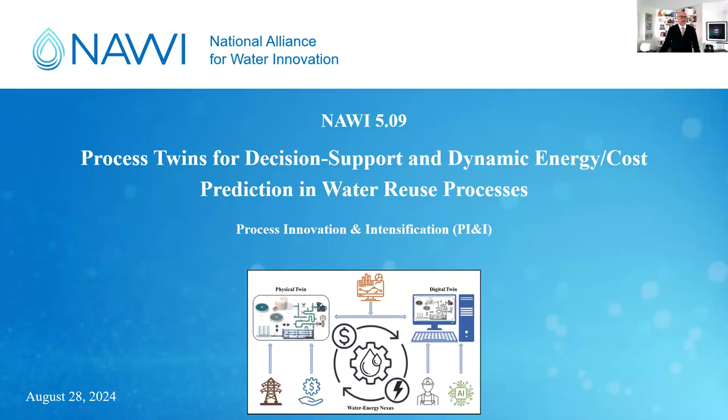Hello, everyone. Good morning and good afternoon, wherever you are. And we have the deck here now pulling up. So today it's my pleasure to introduce the team and the slides on behalf of the team, and then pass the baton to the rest of the team members to tell you the story about this ongoing project. The project team, you can see, is two institutions: UCI and Oak Ridge National Lab.

We have a number of people today from the team who will present. Philip Bingham is the co-PI with me, managing the project. From Oak Ridge, we have Chris Villet, Alex Melling, and Sally Ganem, who are three researchers. From UCI, we have Brian Taroja, who's a researcher, Nader Rezai, who's a postdoc, and Puri Gorbani Bam, who's our PhD student.

First of all, I want to say that Orange County Water District deserves all of our praises and many thanks, and a Nobel Prize, for hosting the project and supporting it, because I can never find enough words to thank them for all the support they've given us in the field and to the rest of the team. They're hosting the pilot there. I also want to acknowledge Glacier Technologies, who have been really generous in helping us fabricate, commission, and debug the pilot unit.

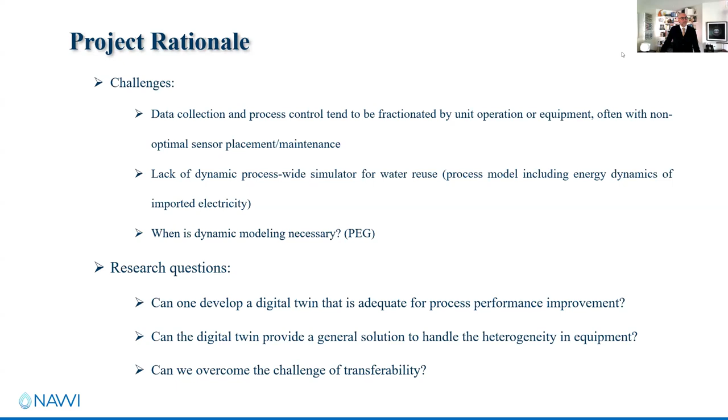Thank you, hello everyone, this is Nader. I would like to talk briefly about the digital twin, the concepts and challenges associated with it, and then I will talk about the development, design, and implementation of our pilot, which serves as a physical twin for this project. Although there are several definitions of a digital twin, I like this short definition that says a digital twin is a virtual representation of an operating physical entity synchronized at a specified frequency and fidelity.

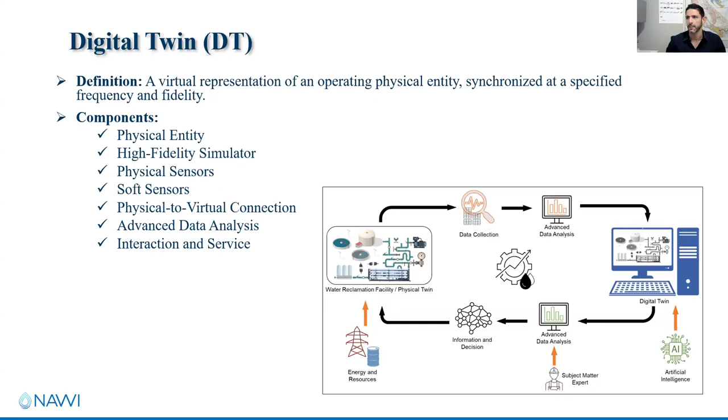So this physical-virtual entity has to have several components in order to be considered a digital twin. They include an operating physical entity, a high fidelity simulator to simulate the main processes in the physical entity, sensors so we can get data throughout the physical system, two-way communication between the physical and virtual entities, advanced data analysis to translate and curate the data between them, and obviously they have to provide the service.

So if a digital twin is implemented in its full scale and full application, it can provide a variety of services, including monitoring the physical entity, optimizing it, calibrating the physical entity, forecasting the behavior of the system, and evaluating sensitivity analysis to the input parameters. It can also serve as a safety feature, for example shutting down the system when a variable reaches a certain threshold.

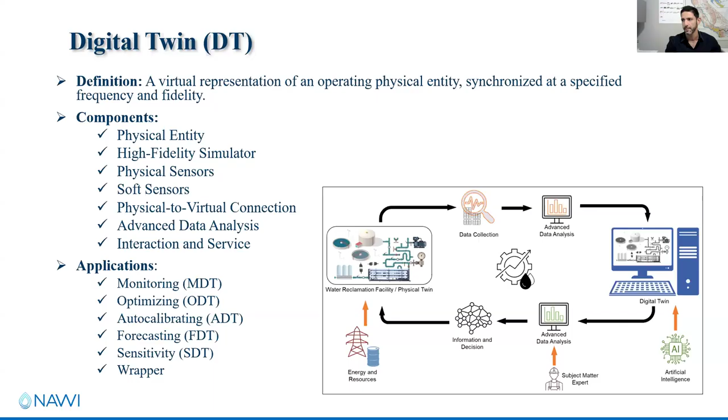So in order to better understand what we have to consider and what challenges we'll face in implementing the digital twin in the water industry, we first evaluated studies focused on development of digital twins in other industries to see what lessons we could learn. Then we reviewed over 100 papers and reports focused on development of digital twins in the water industry. As you can see on the right, though it's very tiny, we went through all of those studies and figured out what they focus on and what features of a digital twin they consider in their study.

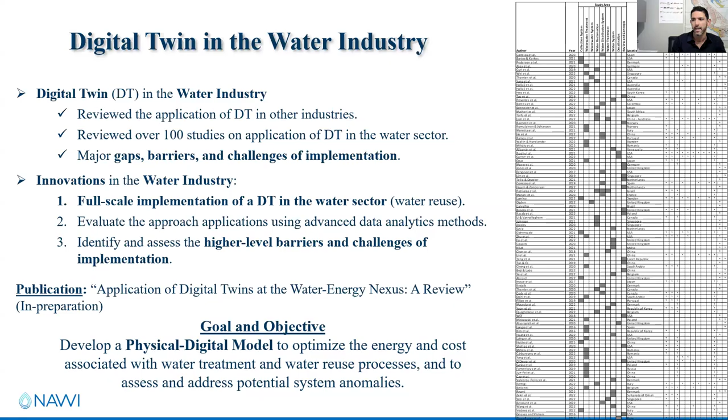Although the majority of these studies haven't even come close to implementation of a full-scale digital twin in water systems, a few of them seem very promising, and the majority of those few are developed by major water design companies. We are putting together all of the findings from the review study into a comprehensive review paper. We defined the goal and objective of this particular project as development of a physical digital model to optimize the energy and cost associated with water treatment and water reuse processes, and to assess and address potential system anomalies.

So for implementation of our physical twin, which is basically our pilot, we selected Orange County Water District, or OCWD. OCWD is one of the most advanced and largest water reclamation facilities in the world. You can see the process flow diagram for the facility in this slide. As you can see, they consist of membrane microfiltration, ultrafiltration, and then cartridge filter, reverse osmosis, UV disinfection, and decarbonation.

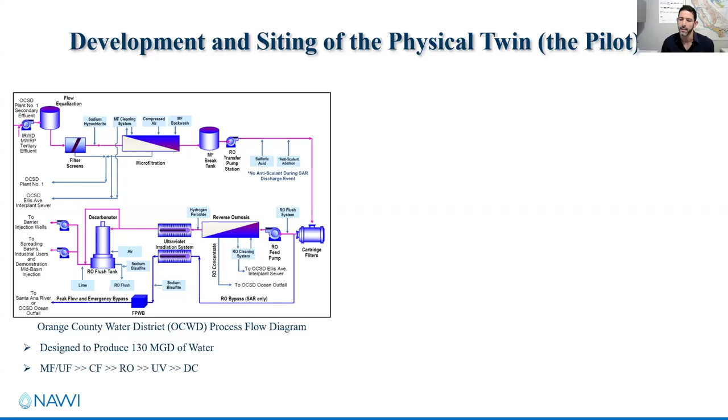The plant is designed to basically produce 130 million gallons of water per day. So although we had some limitations in terms of space, budget, and timing, we tried to design our pilot as close as possible to the main treatment processes as OCWD, and then keep our operating points as close as possible to the operating points of the facility.

So you can see on the right the P&ID for the pilot that we designed. It is designed to produce 11,000 gallons of water per day, and it consists of the major treatment processes at OCWD: ultrafiltration, UV disinfection, cartridge filter, reverse osmosis, and again UV disinfection at the end of the process.

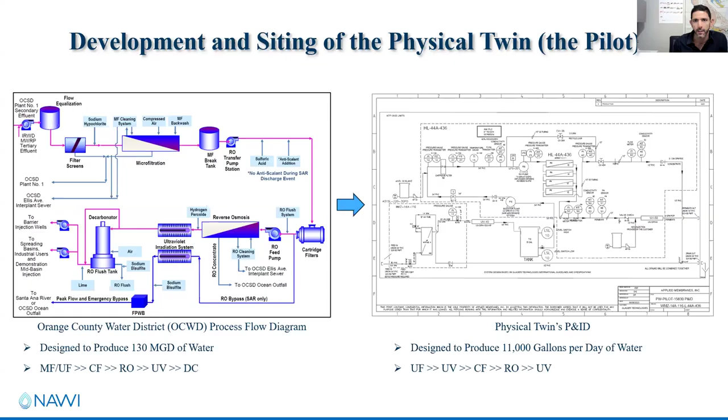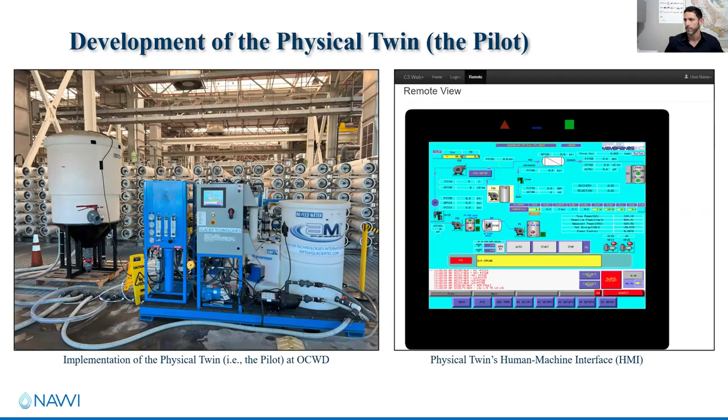And then we also equipped the pilot with a human machine interface. You can see on the right, the screen is basically here on the pilot. So we can monitor it remotely, and we can manipulate the pilot remotely, and it provides an interface for the physical and virtual entities to communicate to each other, to talk to each other through this human machine interface.

So in the past few months, we went through some modifications in the pilot. As I mentioned, one of the goals of this study is to look at the energy consumption and to optimize the energy and cost. So we equipped the pilot. First of all, we loaded this pilot with sensors, so we can get real-time data throughout the system, continuously, to monitor the operation of the system.

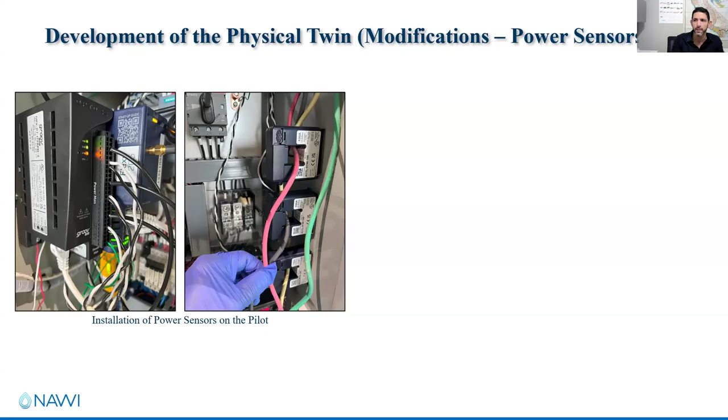And then we equipped it with power meters, so we can basically monitor the power consumption, the real-time power consumption of the pilot, one of the goals of the project. And then it gives us the true power at real time whenever we make any modifications, and then the net energy and the total power of the pilot.

So the other modification that we recently made, as I mentioned, we have a UF system in the pilot. Although we are using the MF-UF effluent from Orange County Water District, we had some fouling issues with our UF. So we replaced our previous UF with two new UF modules, and these two UF modules are equipped with an automated backwash system. OCWD backwashes their UF system every 20-21 minutes, and then we programmed our UF so it also backwashes the UF module every 20 minutes.

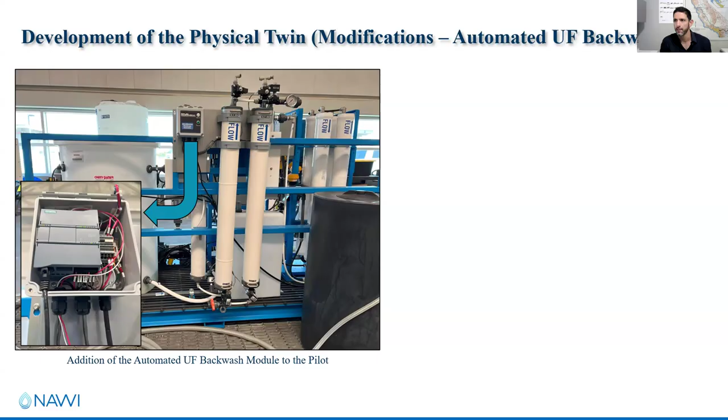And then also, as you can see in the small portion here, we modified our human machine interface also, so it reflects the automated backwash system, so we can also manipulate it, we can control it remotely, and also through the digital twin.

So for the simulator part, for the high fidelity simulator, we are using Sumo simulator developed by the Dynamita team. The Dynamizu is the version of Sumo which is particularly developed for water treatment and for digital twin purposes, which the Oak Ridge National Lab team are going to talk about in more details in the next few slides. So I'll hand it to Sally Ghanem from Oak Ridge National Lab.

Thank you, Nader. So we developed our digital twin with Sumo Simulator, which is a wastewater simulation software package that has a user-friendly graphic interface. Sumo was developed by a team of experts at Dynamita who has over 100 years of combined experience in modeling, to provide water and wastewater treatment process simulation software. Dynamita's President, Dr. Imre Takacs, is also a fellow of the UC Irvine Water Energy Nexus Center, and UC Irvine is also participating in the beta testing of the Sumo simulator.

So what makes Sumo different from other simulators is not only being an open source model, but also being editable, because Sumo models are written in an Excel-based open process code called SumoSlang, which can be easily modified if needed. In addition, the simulator features additional layers of energy and carbon footprint calculations based on the process model, and this capability can be used to assess the electricity demand and the carbon footprint of plant operation for a given period of time.

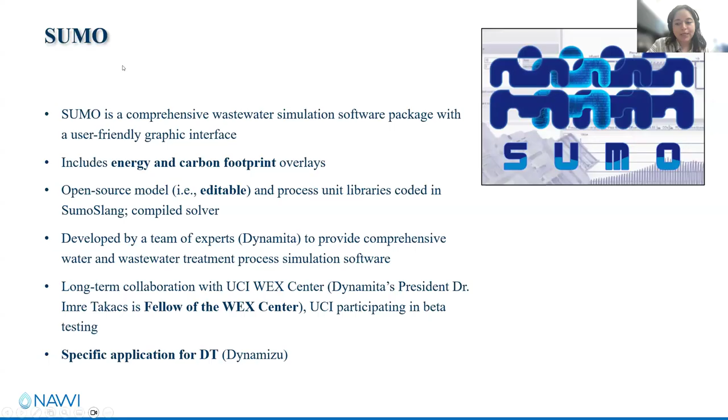So we implemented the physical twin in Sumo Dynamizu, and the process model code is documented and provided in a Git repo. We also modeled the water district treatment train in Sumo Dynamizu and uploaded the documented source code to the same Git repo. And in a minute we'll be talking about the two.

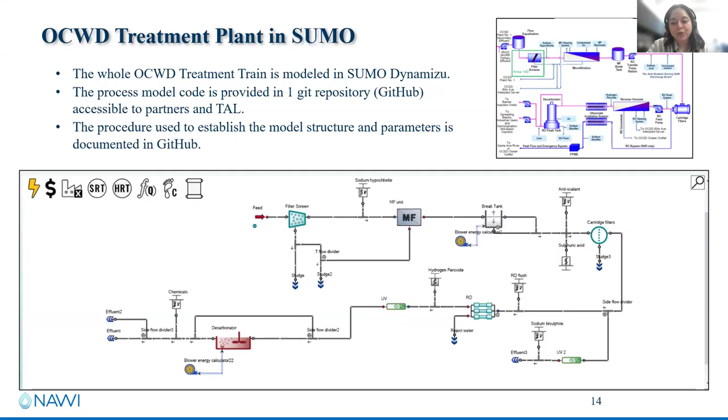What we're trying to build is an infrastructure for doing research. So we have the physical pilot, and we can perform experiments on it that we couldn't do on the full-scale system. We can take those measurements and use them to train the Sumo model. We can run the Sumo model from Python and run some optimizations. So we've built out a lot of this architecture and infrastructure that will allow us to continue doing interesting experiments and try a bunch of different things out.

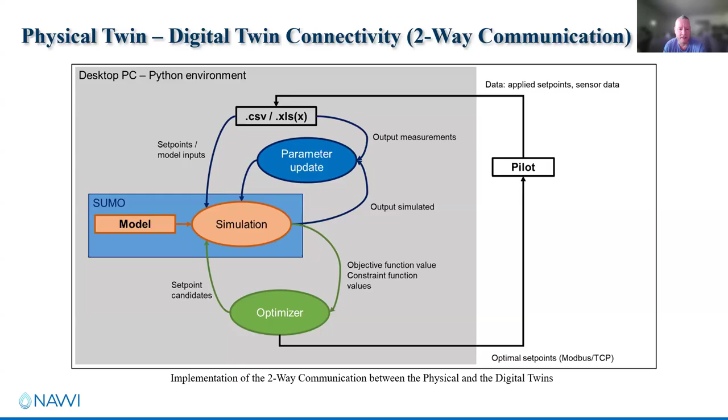If we can go to the next slide, Nader. So one of the first things that we need to do is train the model to match the actual physical system, the pilot. And so we do that by running a series of experiments on the pilot system itself.

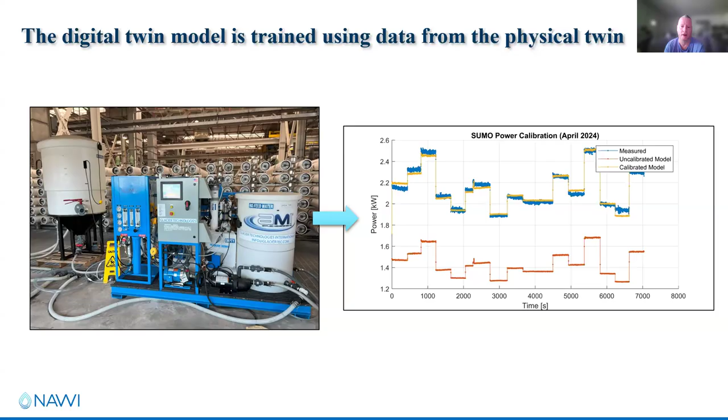Go on to the next slide. So Sumo is kind of the modeling engine, but we're running everything through Python. And that allows us to call the model and get data back, and then run various different optimizations - things like optimizing the specific energy consumption, and calibrate the model, because we can change model parameters in Python, and those get pushed up to the model, and then we can get the results back and again do things like calibrate the model to the actual physical data.

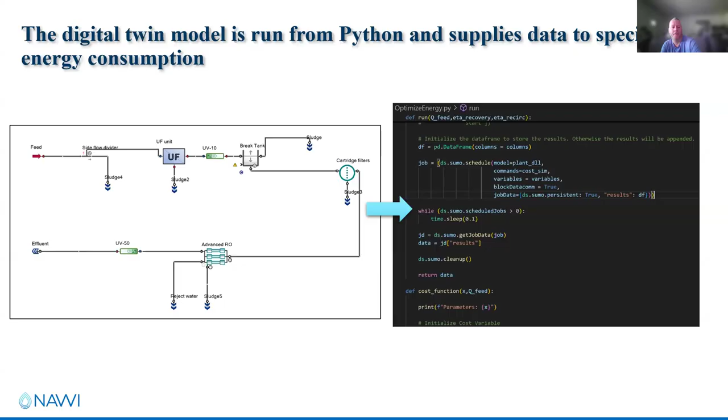Briefly - Brian will talk more about this in detail - but this is an initial optimization that we did, and so we're able to exploit energy prices and generate about a 5% lower specific energy consumption over a 24-hour period. But again, Brian will talk about this in a little bit more detail.

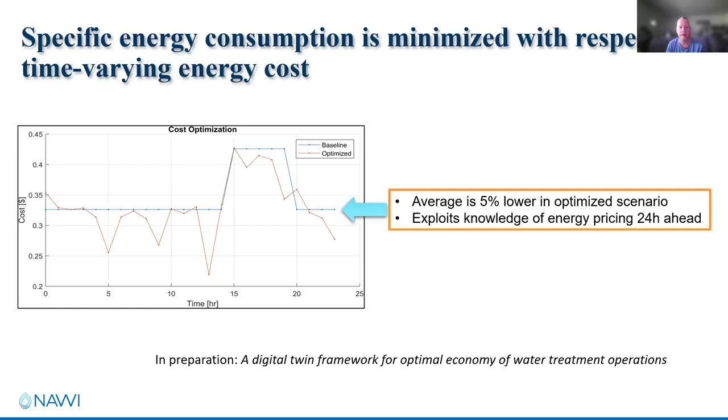All right, so kind of just to wrap up the last section, we're going to talk about the energy and cost assessment. So the overall scope of this project is to map out what the design space of a plant like OCWD can be, and see how far you could push it in different directions with regards to how it operates, and what are the limits on the processes. And we're doing all that testing on the pilot, right?

But one of the things we want to understand coming out of this project is what is the potential for the system to operate in ways that reduce energy consumption, reduce emissions, and or reduce cost. So we're leveraging the dynamic model of the OCWD facility, and also of the pilot, to determine what are the energy and power dynamics associated with operating in response to electricity price variations.

We're also interested in looking at what the response would be to emission signals, so that this sort of energy overlay will give operators information like: if you do this, maybe you could save this percent in cost, or if you take this set of decisions, you can maybe save this percent in emissions. And it's up to the operator to decide whether that's worth it based on other priorities of the plant, but we want to be able to map that out.

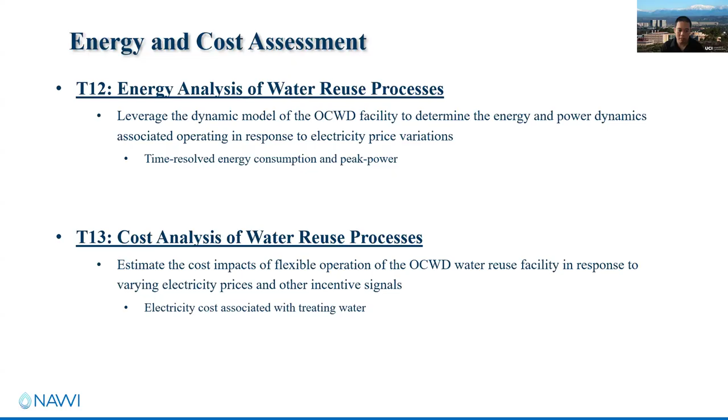So these two tasks of the project, 12 and 13, are energy analysis and cost analysis of water reuse processes. To do that - next slide - as Alex pointed out, the first thing is we're applying this to the pilot because we have a lot of experimental data for it, and we can run experiments on the pilot in extreme conditions so that we can calibrate the model a lot more closely. We're also going to apply this framework to the model of the overall facility. So there's an optimization framework that was developed, as Alex talked about, and we've applied it to having a simulation of the pilot respond to a Southern California Edison electricity tariff.

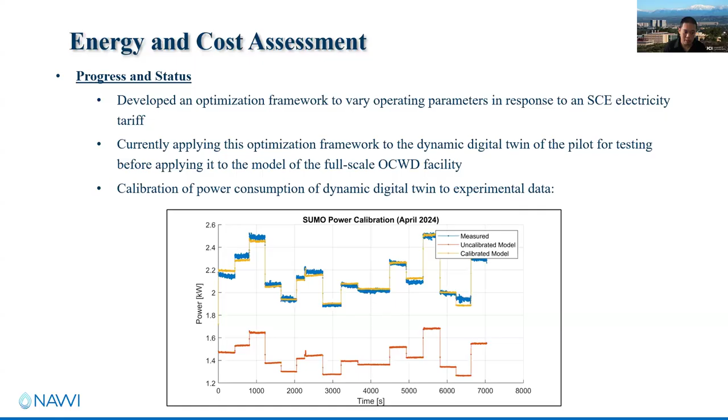And we're also applying this to the full-scale facility. So first we had to calibrate the power consumption, as Alex showed. That's just this graph.

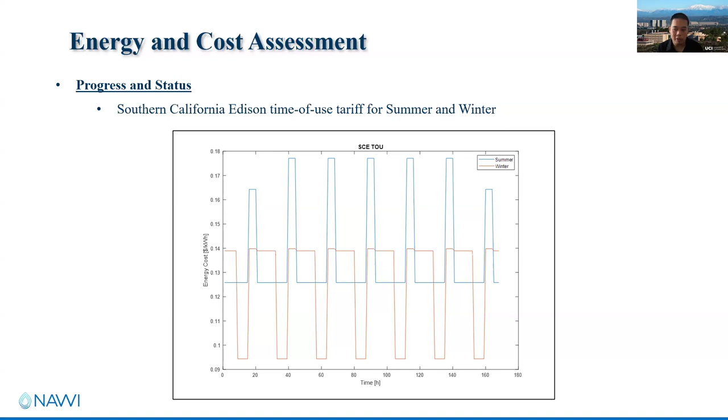So that's where they don't want you to use electricity. However, in the future, we could also apply not just SCE tariffs, but if there's potential for the plant to participate in the wholesale market or provide other kinds of grid services, we can throw those signals in there as well.

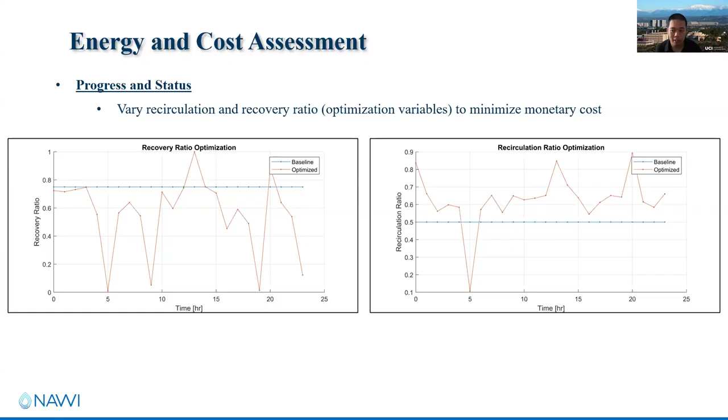This comes with a disclaimer that we haven't fully optimized the optimization. There's still more to be done in terms of searching for solutions and playing with the cost function and constraints. But for this initial example, we were able to get overall costs reduced by 5% with our modeling of the pilot.

We're also going to look at whether the estimates of cost and energy savings from the pilot translate to cost and energy savings of the full-scale facility. So we're going to be comparing those moving forward in the future.

As I mentioned, we are using the Dynamizu by Dynamita team as our simulator. So we are basically simulating the main treatment processes in our pilot, and also the main treatment processes at OCWD. The WaterTAP team is also working on a steady state simulator.

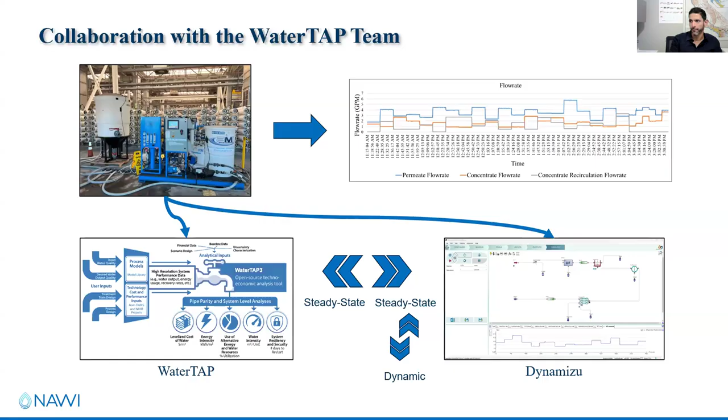So I hand it to Chris. Thank you, Nader. I have the pleasure to explain what we're going to do next.

So we continue experimental work and data acquisition. We have a few experimental designs on the way, particularly to look at loading of the cartridge filter and membrane. However, if you feel like there's a specific experiment that we should do and may not have thought of, please let us know now that we have this set up.

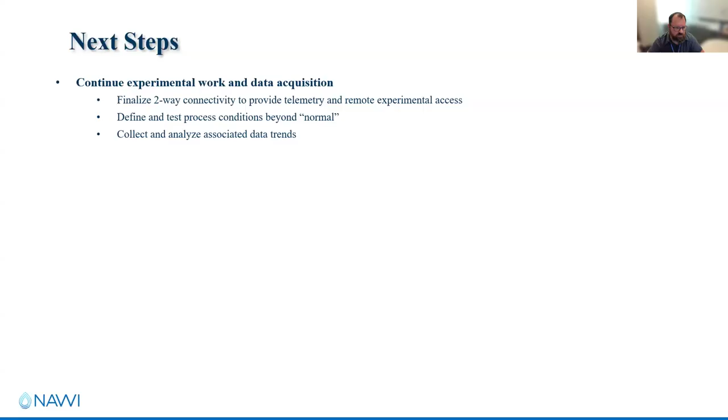So we'll finalize the two-way connectivity to make sure we can control the system in real time remotely for defined test process conditions, to essentially push the pilot to its limits. Next, collect the data and analyze it as we have. Then to tune the optimization framework, we'll finalize the decision variables, the objective function, as well as constraints.

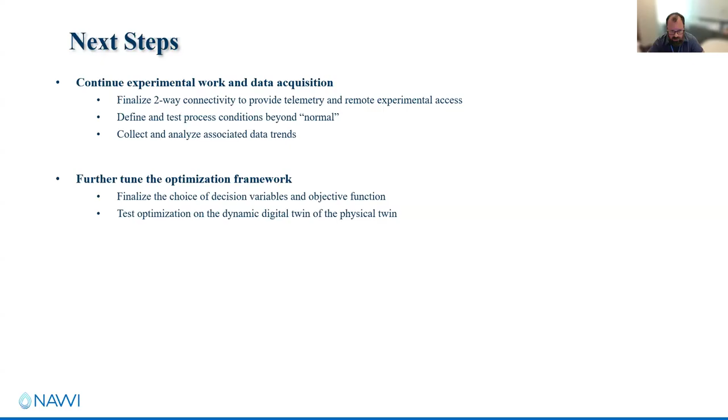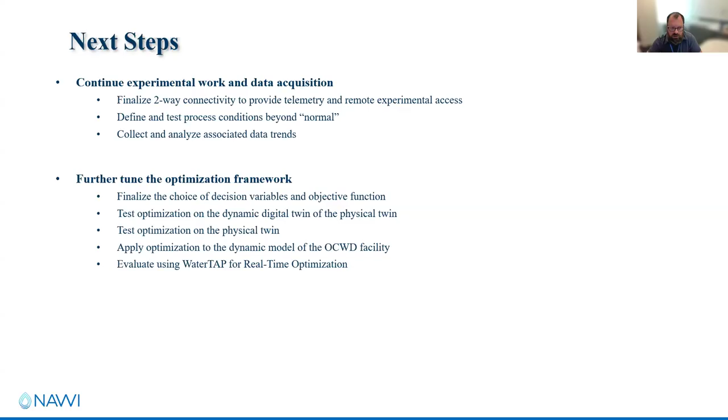We'll test optimization as we started and showed today, basically in silico on the dynamic digital twin, then move to optimizing the physical twin. Next, we'll ultimately apply optimization to the dynamic model of the Orange County facility to see what optimization potential we have on the real plant relative to the pilot plant, and we'll explore the use of WaterTAP for real-time optimization.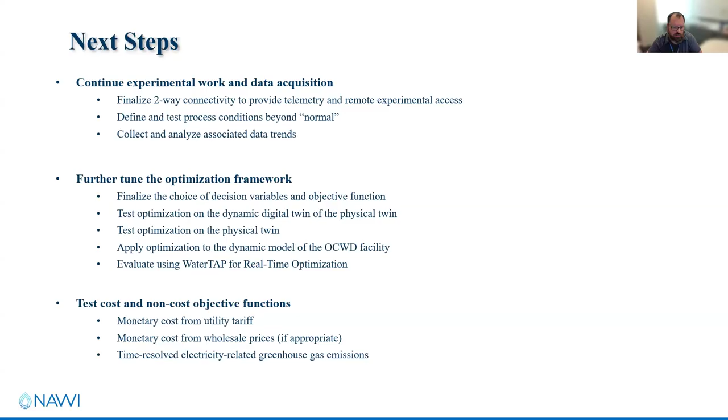To test cost and non-cost objective functions, we currently, as Brian has shown, focused on monetary cost based on utility tariffs. We can move towards wholesale prices, as mentioned, and we can also factor in costs that are non-monetary, such as carbon footprint or greenhouse gas emissions, all of which can be resolved in time.

So the project provides crucial information on what we can do and what the challenges are with the use of digital twins at full scale. That's the first effort, as far as we understand, to have a full-scale digital twin system that can reduce cost in the water sector, not only monetary cost, but also energy, carbon footprint, and so forth.

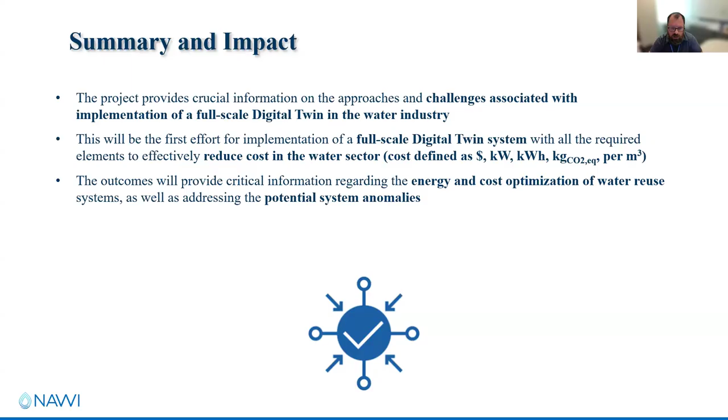And the outcomes of this project will be critical to inform us, NAWI, as a community, as well as outside of the community, as to how and when we can optimize energy and cost for the water reuse system, as well as addressing potential anomalies as we optimize and move these systems to their boundary of operation. So finally, that should be a path forward to further research on implementation and use of digital twins in the water industry. Thank you.

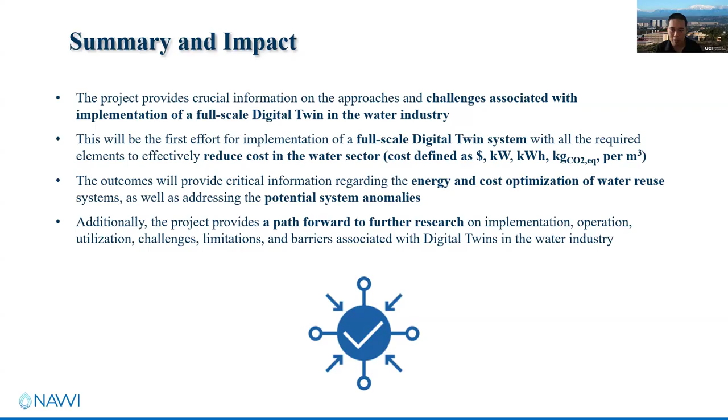One thing we haven't explicitly said, but want to make clear to everyone, is we don't aim at controlling a plant. We aim at giving information so those who have control authority can make more informed decisions. So the person with a driver's license still drives the car, but now has one more instrument, miles per gallon, not just the speedometer, odometer, or RPM meter. That's important, because the utility is eventually the one who's going to take action.

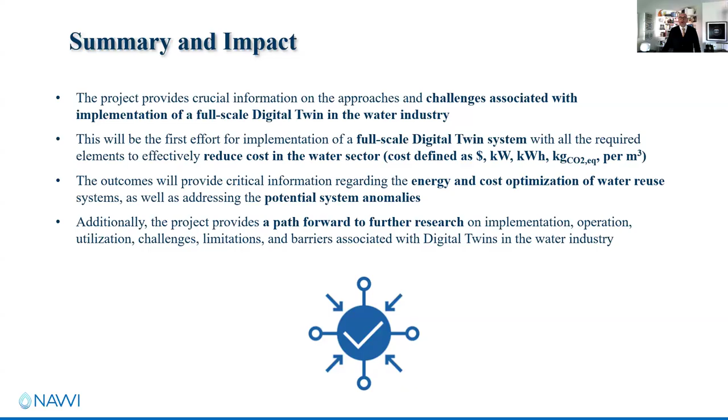There is a question from Megan, speaking of utility: can you clarify what was on the y-axis for variable operation? What is being changed by the operator to minimize energy costs? So in those plots, I think there were the different process conditions for the RO, is that correct? Is that the ones we displayed here?

The initial results were applying optimization to modeling of the pilot. The two variables they were using were the recovery ratio and the recirculation ratio in the pilot. Now, when we apply this to the full scale facility, we might choose different control variables, but the optimization framework has the ability to do that. Alex can add more detail if needed.

So again, this is just a first pass at the optimization to really test our system and make sure that all the bits and pieces can talk to each other and get data transferred back and forth correctly. This isn't an optimization that we would ever suggest an operator does. It's more an example of can we get all the pieces to work together. We'll refine this optimization significantly in the future to be more practical.

Now that you saw that we can do it, we can establish constraints that are more applicable to different scenarios, facilities, and equipment. So the important thing is to establish the way to do it. This is a method that we can apply and tailor to different scenarios and conditions.

And thank you, Peter, for that great quote. Yes, it's not operator versus the machine. I think we will always need the operator. Somebody needs to take responsibility for running the plant.

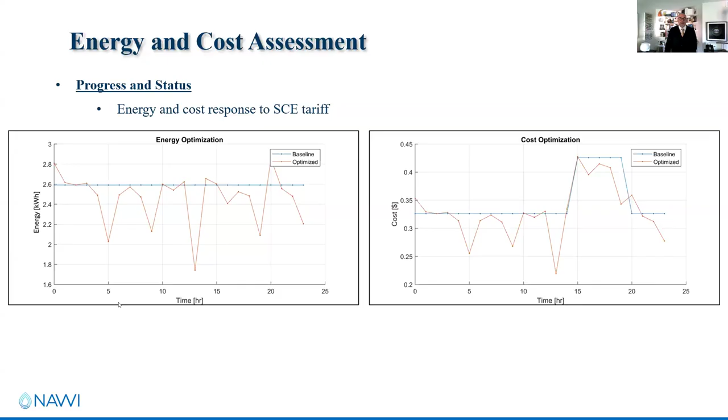Chris and the rest of the modeling team, would you like to add to what I said?

Sure. The strategy of the way this works is you have a set of chemical reactions, and they end up in a so-called Gujer matrix. What that means is each row in your Excel table represents a reaction, and each column is a constituent in the water. Then there's a final column at the end of this matrix that's basically the reaction rate.

So if you want to change the process, it's very easy to change the chemistry or the chemical reactions occurring, or the separation phenomena occurring in a process unit, by adding rows for additional chemical reactions or separations, and adding columns for additional constituents in the water. This is a very intuitive way to modify the processes as needed, and because you're interfacing with Excel, which most of us are probably familiar with, it's quite intuitive. So that's more or less how that works.